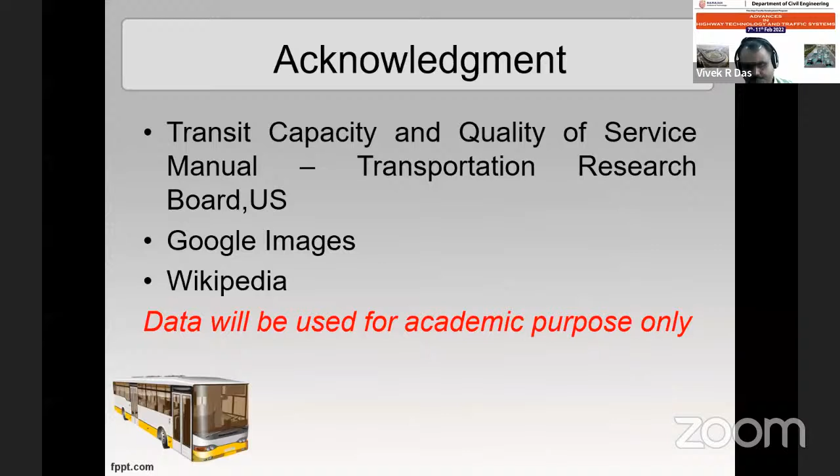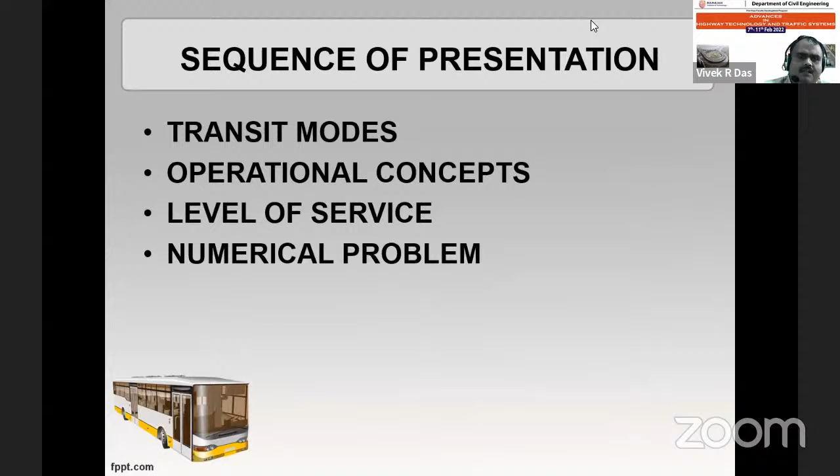So my sequence of presentation is shown here. I'll start with different types of transit modes available throughout the world. Then I'll get into operational concepts. Then how the level of service is estimated for a particular case. And finally, I'll go through a small numerical problem showing how a particular change in the system brings about a change in the level of service in public transit.

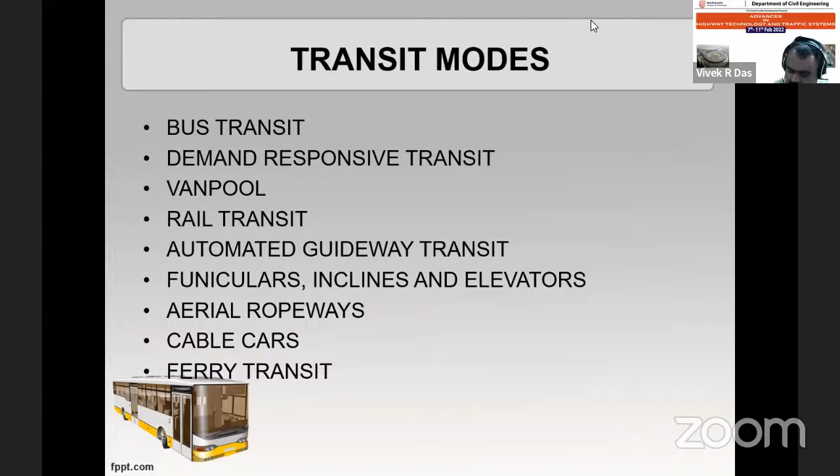Now if you take transit modes, especially we have bus transit, then demand responsive transit, then van pool, then rail transit, automated guideway transit, and funicular inclines like that. Let us see each one by one.

Another one is demand responsive transit. In India, we don't have this concept. This will not have any fixed route. The route will be varied based on the demand, and they provide these services within a particular route.

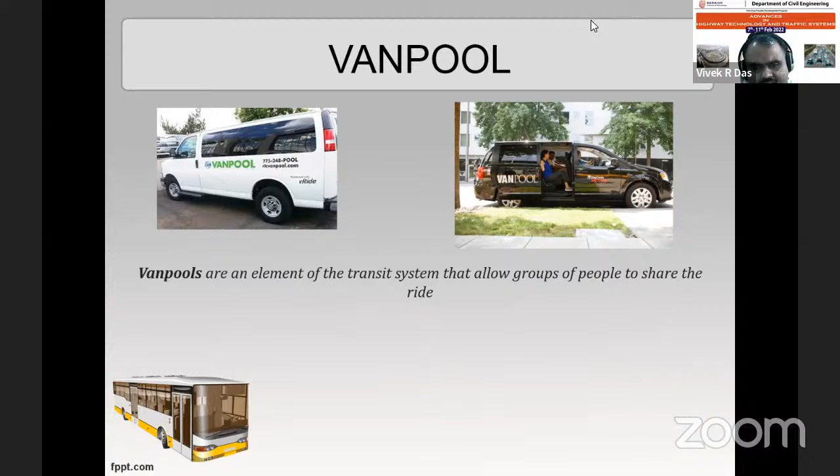Another one is van pool. This is somewhat similar to carpooling. There is a group of people who are going from a particular origin to a particular destination. They used to use a common mode.

Now all these transit services, what I am showing, has mainly three components. One is passenger load, second is speed, and another is reliability. I will discuss what each of these is in detail.

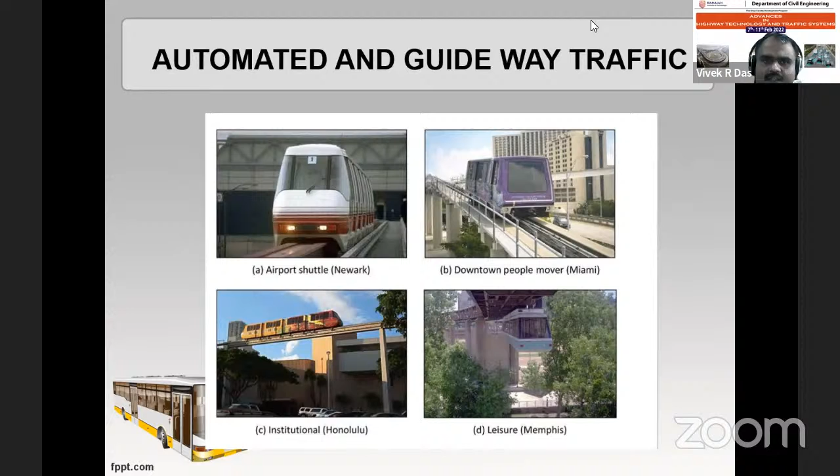Because to analyze a system, suppose you had developed a particular transit system in a particular route, you want to assess whether it is working properly. So how will you do it? These things will be discussed through this analysis of capacity. Or if you are implementing some changes in a particular system, how these changes will affect your transit capacity or level of service.

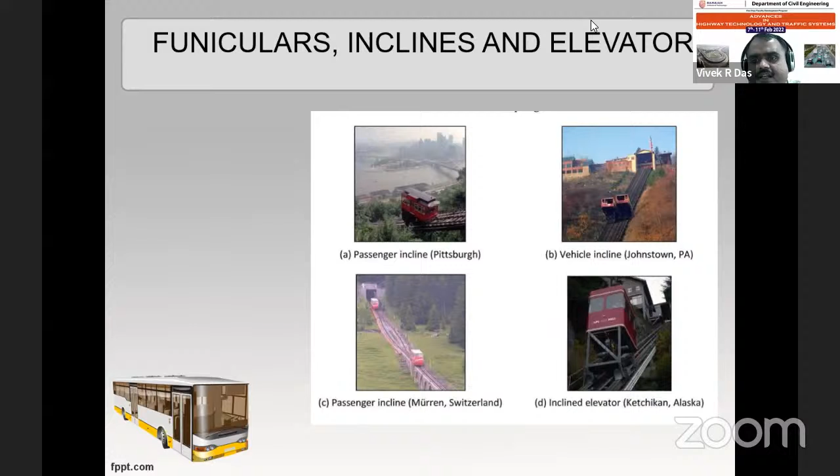Now let us see the operational concepts of a particular transit system. The most important parameters with respect to operational concepts are capacity, speed, and reliability. In addition, other parameters which contribute to operational performance are passenger demand characteristics, dwell time, the operating environment, and stop and station characteristics.

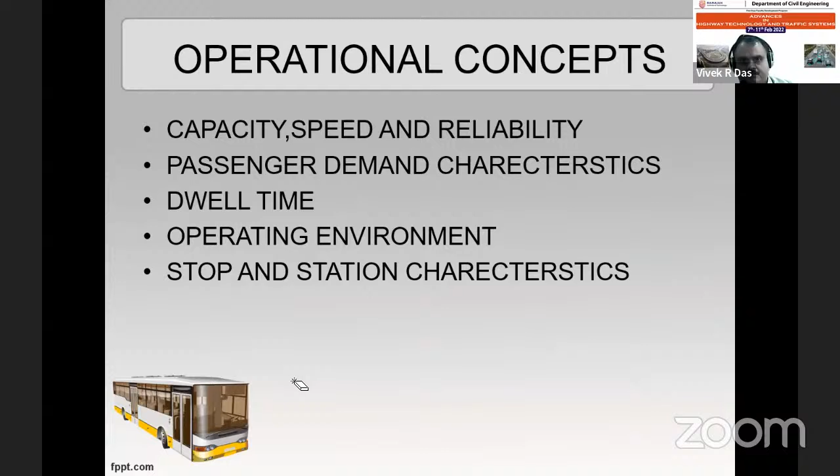Now we will see one by one the definition of this. What is person capacity? Person capacity is defined as, suppose if you are having a particular route. It is the number of passengers which can be transferred through a particular point under specified operating conditions without unreasonable delay, hazard, or with reasonable certainty.

These points are critical with respect to capacity. You have to specify what the operating conditions are, what the delay should be, what the hazard or restriction is, and what certainty you have to provide. Operating conditions means you can have different types of roads: 2-lane, 4-lane roads, or dedicated lanes. Those are operating conditions.

Without unreasonable delay means this delay varies with respect to land use. Suppose if you are having a particular road and this road has many schools, one school here, another school like this, then the delay will vary when you compare with other places having the same operating conditions and other parameters like hazard and reasonable uncertainty.

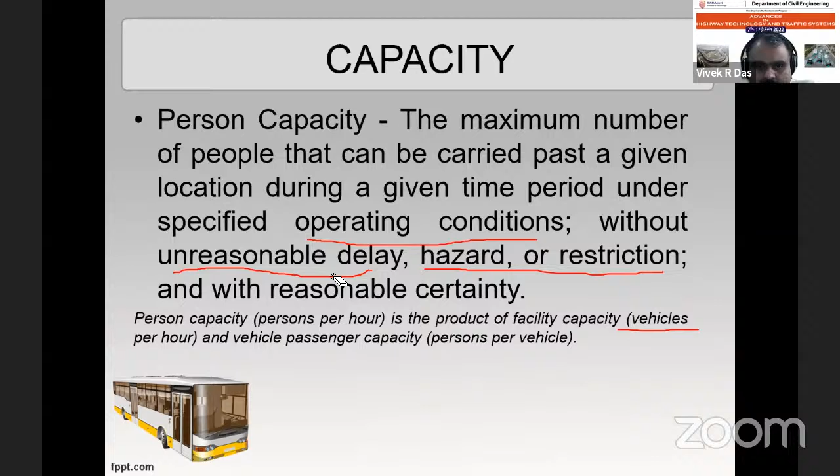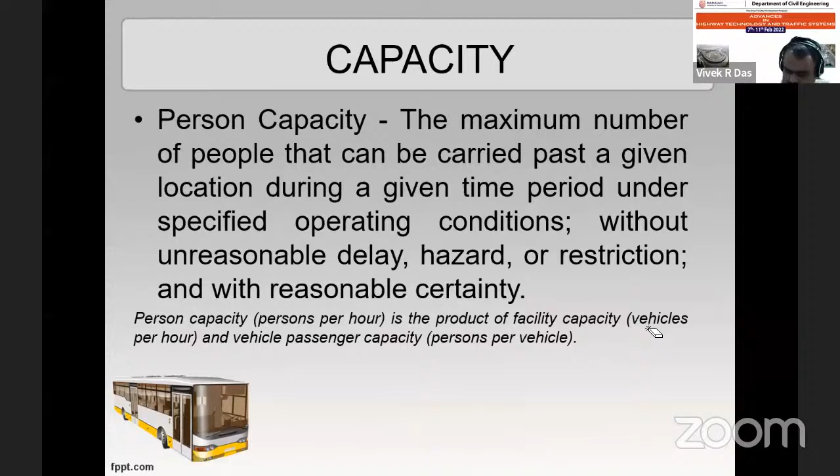Now, as I told previously, this depends on given locations, then operating conditions. If you take operating conditions, hazard and uncertainty, some places will have unreasonable delay. Just like I told you, some schools have land use changes, so the boarding and alighting time will be varying. So these factors have to be first fixed to fit the capacity of a transit system.

Now, with respect to vehicle capacity, it is the number of vehicles that we generally take with respect to traffic volume count survey: what is the number of vehicles which can pass through a particular point in a given interval of time? In our case, it is the number of transit vehicles, whether buses, trains, or other vessels.

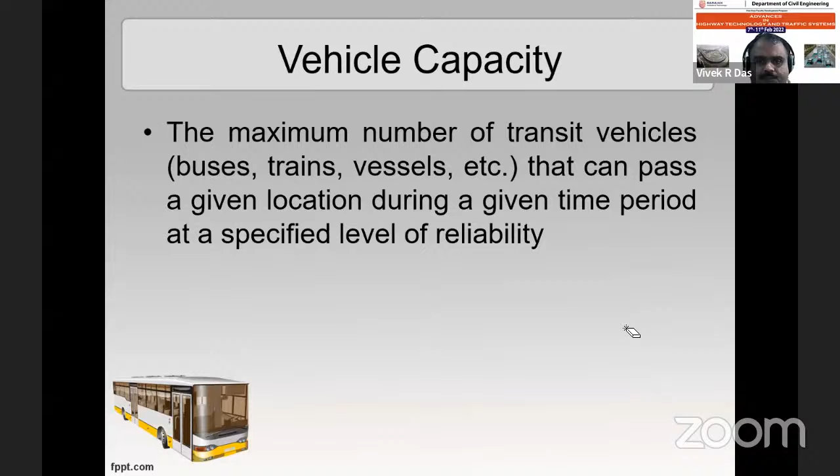Now we will take what are the factors on which passenger capacity depends. Generally, the unit will be number of passengers per hour. It depends on two things: vehicle passenger capacity, that is, what is the number of passengers that can be accommodated in a vehicle, and then the number of transit vehicles which are moving in a particular route.

If you take within these vehicles, this depends upon how many standing people there are, and how many unit vehicles there are. For example, if you are having a metro, you may have 2 or 3 cars, and that decides the number of passengers which can be accommodated in that service.

Another factor is seats and wheelchairs. If we include wheelchairs, the movement of passengers becomes difficult and the space gets reduced. Another important parameter that decides the seats and standees is the size and layout.

So previously I have shown some 3 or 4 pictures of bus transit. If you go inside these buses, the seating arrangement of each bus is itself different, so whatever number of passengers you can adopt in that also varies.

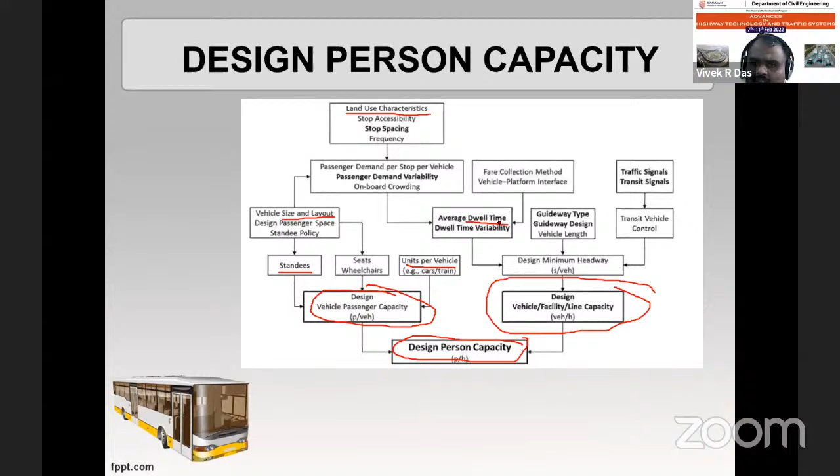Now, another important factor which depends on the capacity of transit is the speed. Speed is nothing but what we have studied as different types of speed in traffic - it is the distance traveled by time. That depends upon the travel time rates, that is, if you take a particular link, what is the travel time per mile or per kilometer within that link.

This travel time depends upon delay, then passenger service timing, and running time. Now, this running time depends upon the guideway design and vehicle speed. Suppose if you are having an old bus, the running time will be different. Suppose if we take the case of BRTS, Bus Rapid Transit System, you are providing a separate way for that, so the running time is different.

Now, if you take delay as a parameter, this depends upon transit preferential treatment. This means, as I told with BRTS, you are giving a dedicated lane, so delay will be less.

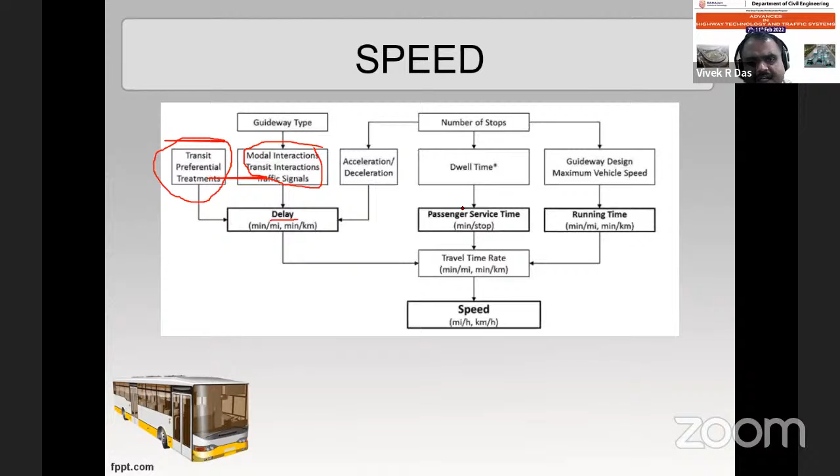Another factor is modal interaction. Modal interaction means within a road, you have different types of vehicles. If you take the case of bus transit, in the peak hour it has to interact with other vehicles, maybe cars, two-wheelers, and so on. Then traffic signals are another thing. So all these factors contribute some amount of delay.

Another factor is the acceleration and deceleration characteristics of the vehicle. Finally, these all come down to the number of stops. If the number of stops is more, then the acceleration and deceleration characteristics will also affect your speed. So when you look into the micro level, small parameters contribute small changes in the speed, which finally result in the variation of capacity and level of service of your transit.

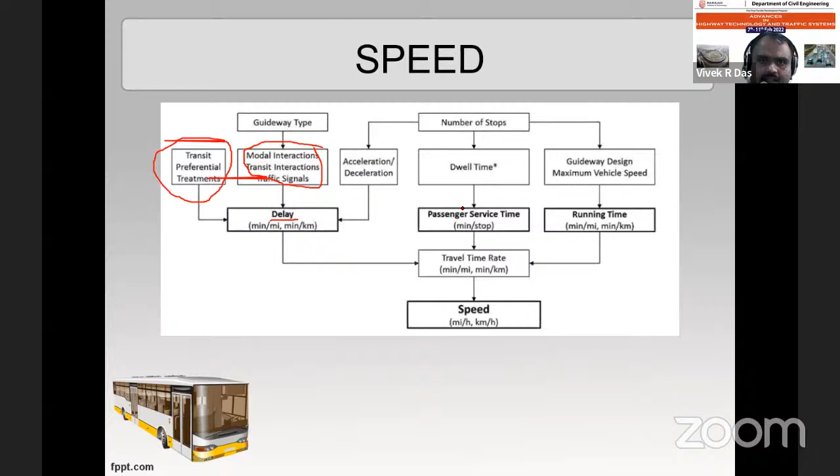Another important part is reliability. This is common in our roadways. If you define reliability, it is the confidence with which a bus will come to a particular stop at a particular time.

This varies with vehicle quality or vehicle age. In Bangalore, what we have observed is, if you want to move from one point to another, if you go in a Volvo bus you can reach very fast compared to a normal bus. A normal bus is old, and its acceleration and deceleration characteristics are different. If you fix a time of 9:20, it may reach around 9:25 or 9:30.

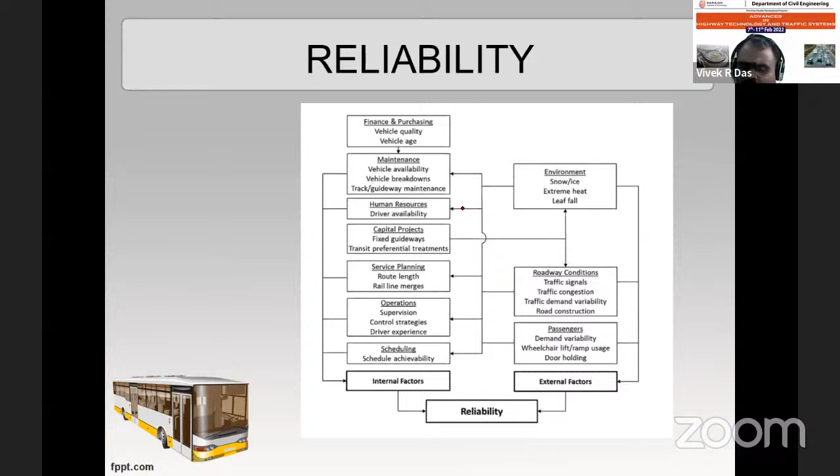Another factor with respect to passengers is, suppose if your bus moves through a hospital location. What happens is there may be a lot of patients there, so their boarding and alighting characteristics will be different. This will contribute some amount of variation in the schedule of the bus.

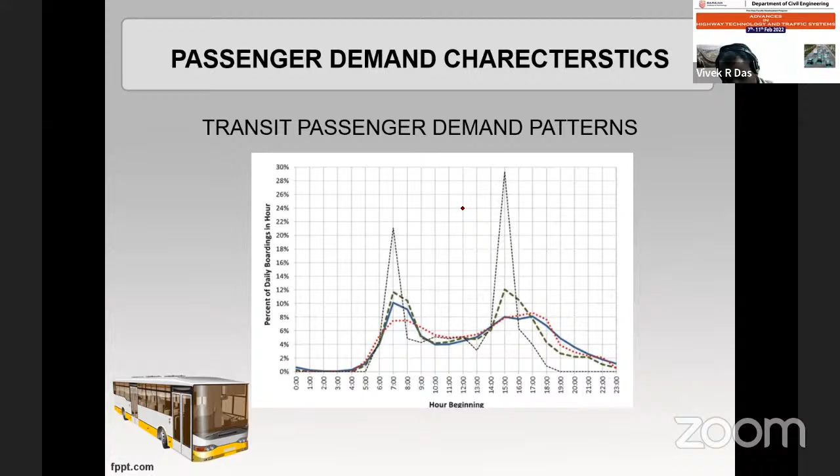Another one is peak hour demand variation. Within the peak hour, if you take a 15-minute peak, you can see that it is slightly higher. This passenger variation will also contribute to the passenger load on a particular route.

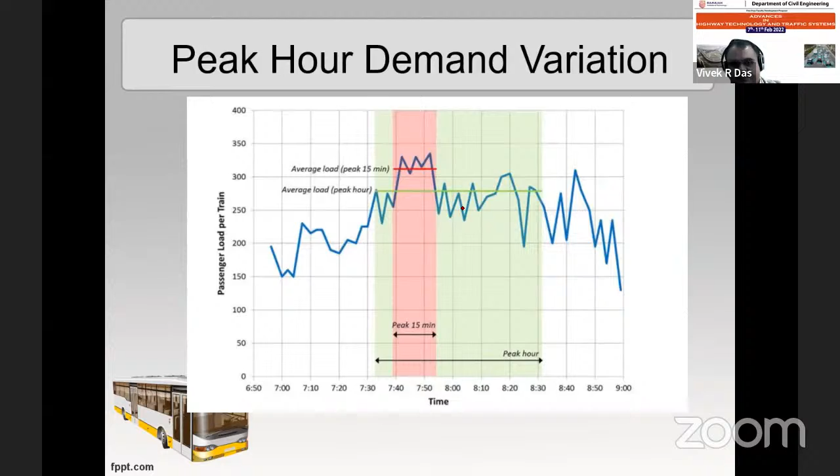And as I mentioned, dwell time is nothing but the time spent at a stop or station, mainly for the movement of passengers. This depends upon passenger boarding and alighting. If the number of boardings and alightings increases, dwell time will increase, and finally it will affect the reliability and the capacity of that system.

Another factor is fare payment. In India, we have mainly two methods: one is a ticket served by a conductor, and another is through a machine. If you have some other method, the passenger interaction within the bus also varies, which will affect the travel time of a particular route.

Another factor is vehicle type and size. If the vehicle size is larger and its doors are open, it will give less time for passengers to board and alight. Another is circulation within the vehicle; if more space is available within the bus, the movement of passengers during boarding and alighting will help decrease travel time.

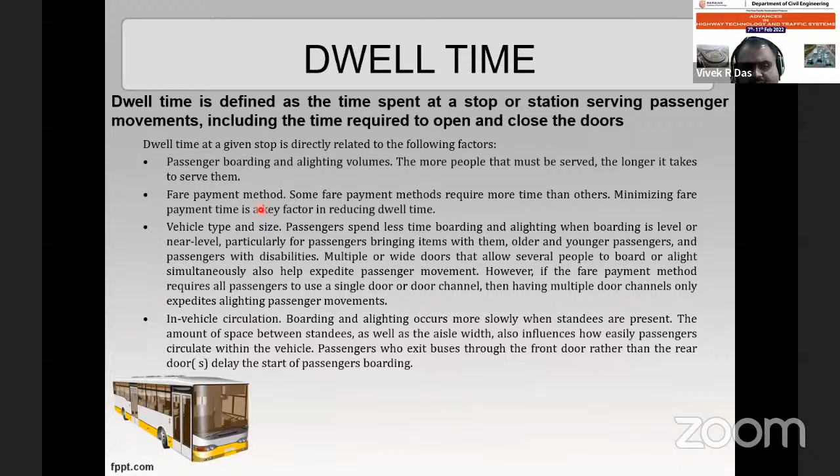Now this particular graph shows the variation of dwell time with respect to capacity of the bus. If I take a particular point, 45 seconds, you can see that the capacity is somewhere around 48-49%. Now if the dwell time is slightly reduced to 35 seconds, you can see an increase in capacity of about 10%, going to something around 60%.

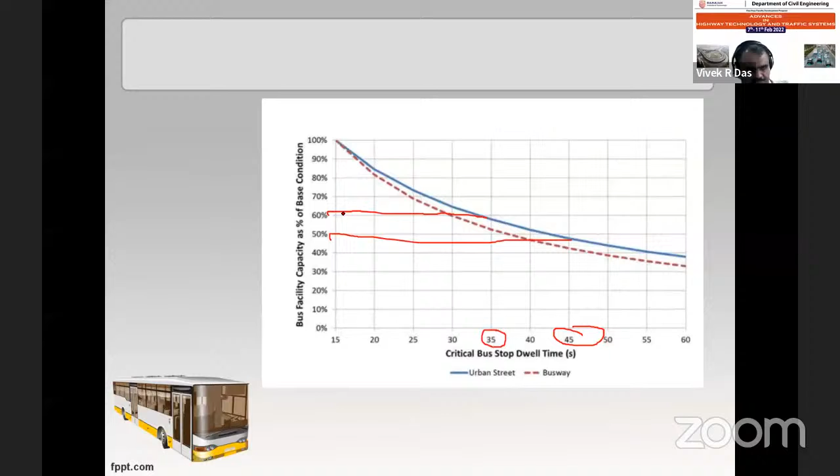Another one is operating environment. Now you are having the transit moving in different operating environments. One is mixed traffic. Best example is our public transport bus. You can see that the bus is moving with different types of traffic, for example, cars, two-wheelers, autos, even bullock carts are also there.

Another one is semi-exclusive, or lane partially reserved for transit use. For example, if you take the example of a light rail transit system, for example, trams in Kolkata, it is a semi-exclusive lane. The thing is, it is moving with mixed traffic, but it is interacting with some amount of vehicles also.

Another one is exclusive lane, but you are sharing a portion of right of way. For example, your bus rapid transit system, that is BRTS, what you are doing is within the road, you are providing a particular lane only for bus.

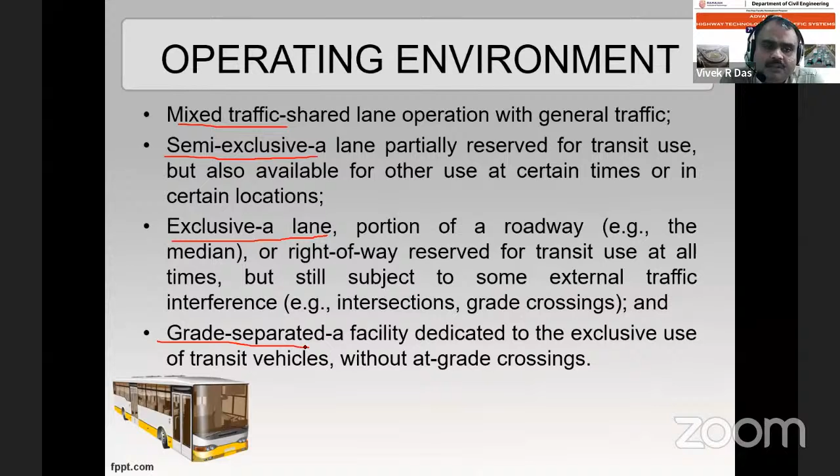Another one is grade separated, the best example is your metro. What you are doing is you are taking the entire traffic away from mixed traffic and a dedicated facility is being provided. This also affects your capacity, and you can see that from mixed traffic to grade separated, the capacity increases drastically, but the cost also increases.

These are some comparisons of the guideway types with respect to traffic control, traffic delay, and speed restrictions. Now, if you see mixed traffic, you can see that the speed is mainly regulated by other vehicles in the traffic. Whereas if you come to grade separated, the speed is not affected by any other traffic. You will go with respect to design speed.

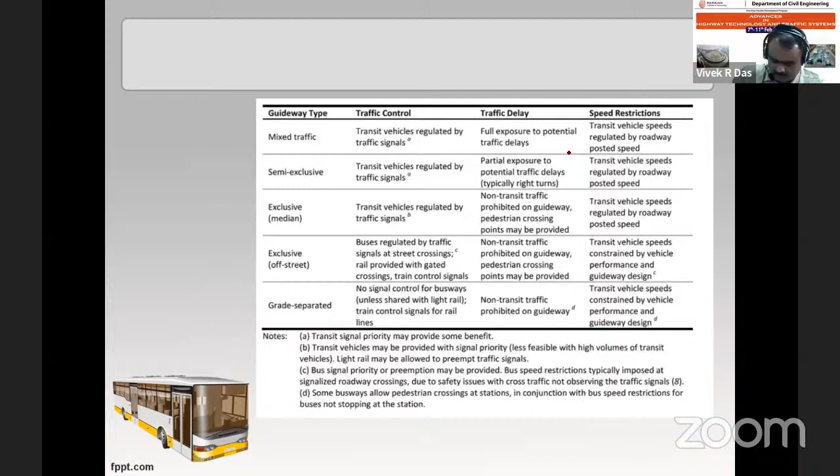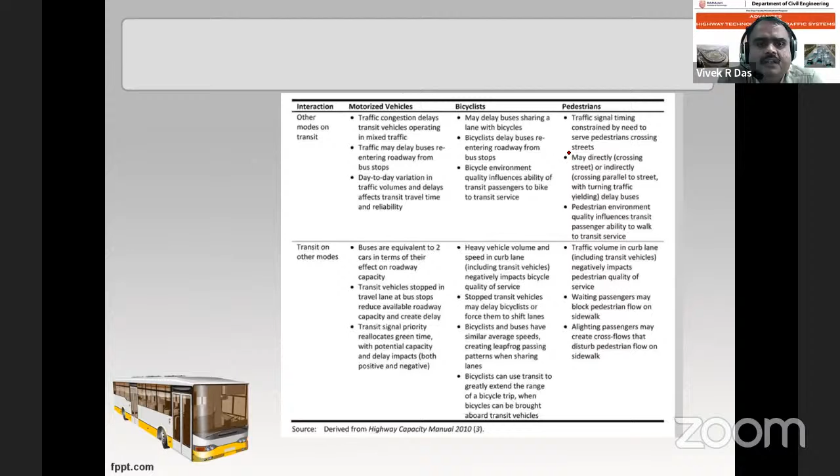Even if you provide design speed with respect to geometrics, you will not be able to achieve it due to the influence of other vehicles in the traffic, in the mixed traffic case. The same thing varies with other guideway types also. In addition to that, there will be some interactions with bicyclists and pedestrians. The presence of bicyclists will delay the buses entering the roadway from the stops. Similarly with pedestrians. So this will also obstruct the movement of transit.

Another important factor which decides the capacity is vehicle platform interface. Now, if you provide a low floor type bus, the boarding and alighting time you can decrease. But with respect to geometry, there are some restrictions. Another one is vehicle characteristics. As I already told, with respect to type of vehicles, the capacity also varies. Another is fare collection and stop spacing. If the number of stops is more, the boarding and alighting also will be more. So this also will affect the capacity in a particular route.

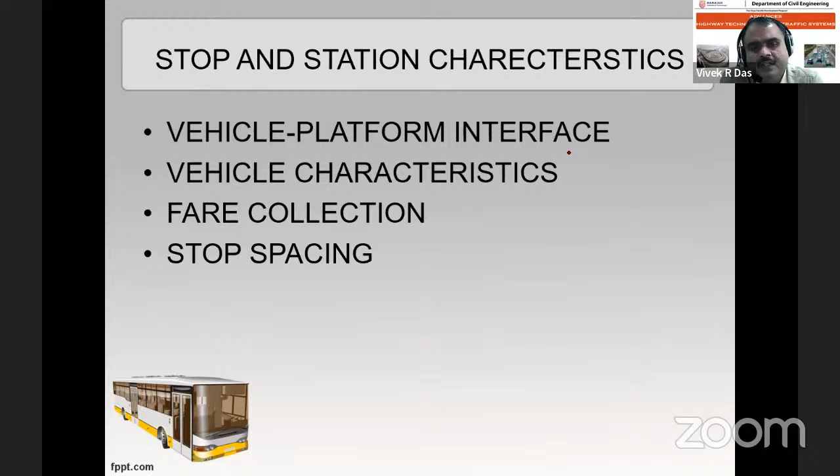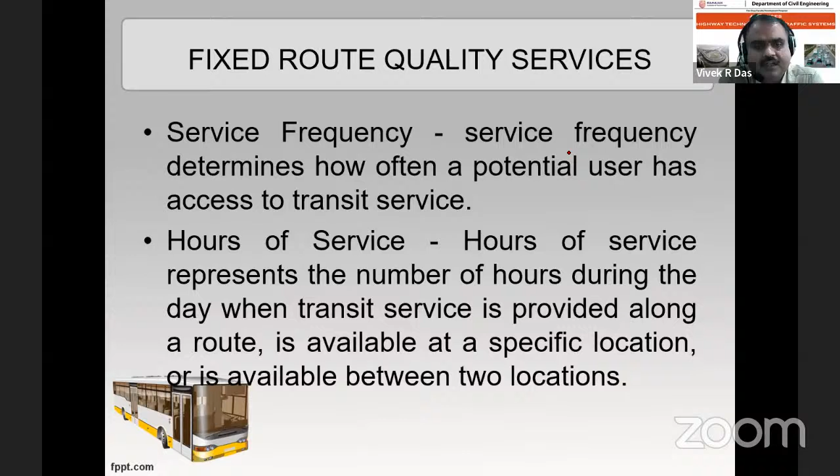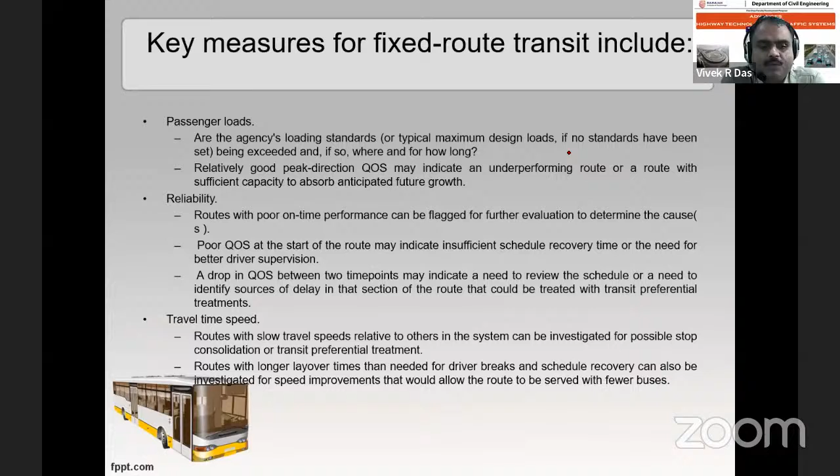Reliability, as I already told, is the confidence with which a particular schedule will perform properly. Another one is travel time. Travel time depends on various factors: number of stops, types of vehicles, type of routes, etc.

Now, coming to the concept of level of service. I am explaining the level of service for a bus transit facility. These are some empirical equations which are explained in the transit capacity manual. The first most important part is the transit wait ride score. The transit wait ride score depends on headway factors and perceived travel time factors.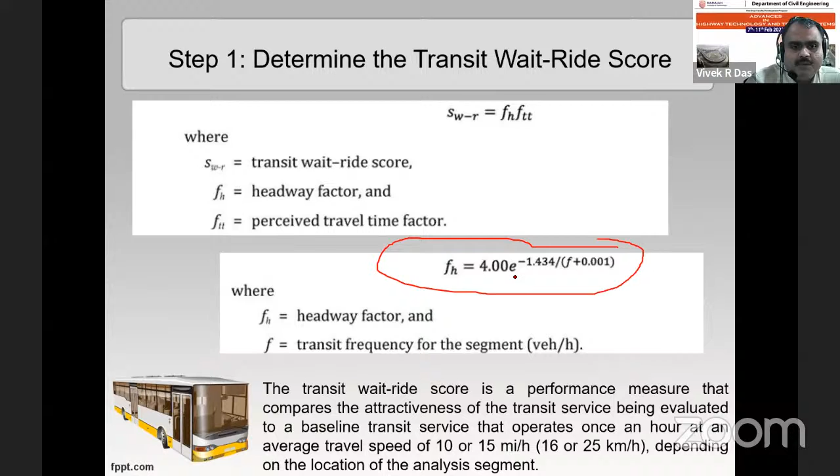Now, if you take headway factors, it is nothing but the number of vehicles or transit which is moving through a particular route. If you see that equation, it is in the form of a negative exponential function. And they have developed an empirical equation for that, and this is shown here. Another parameter is the perceived travel time factor.

So perceived travel time factors have various components. One is relating to passenger loads. Another one is with respect to speed. Another one with respect to reliability. And another one with respect to stop amenities. Now we will see each of these parameters, what it is.

So it depends on ridership elasticity. Ridership elasticity is nothing but the variation of riders or passengers in a particular route. They have taken it based on weight. If you take a metropolitan area, it is 6, and if it is other than CBD, you can take 4. The unit is minutes per mile.

So it is nothing but, in a particular route, if you take per mile or per kilometer, how much time you require to travel. For example, it shows that in CBD areas you take something around 6 minutes to travel 1 mile. Or if you go outside a CBD area, you take something around 4 minutes to travel 1 mile distance.

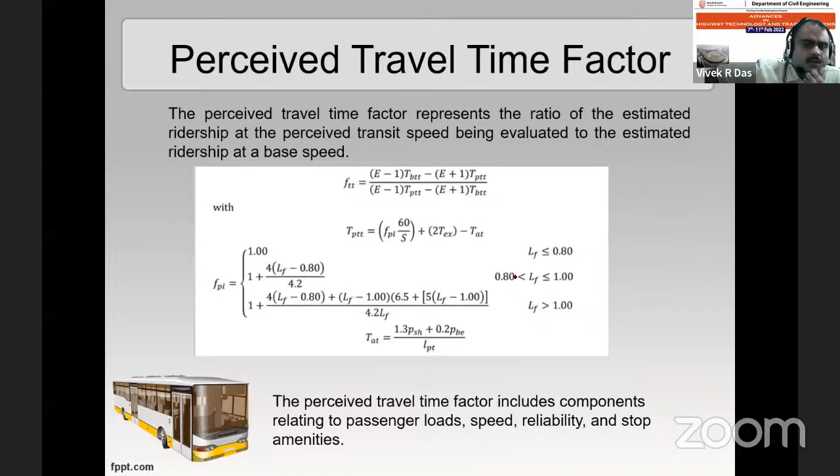You can see the previous equation, TAT. So it depends on the number of passengers, that is passenger trip length LPT, and the shelters and benches available. So PSH is the proportion of stops with shelters and PBE is with benches.

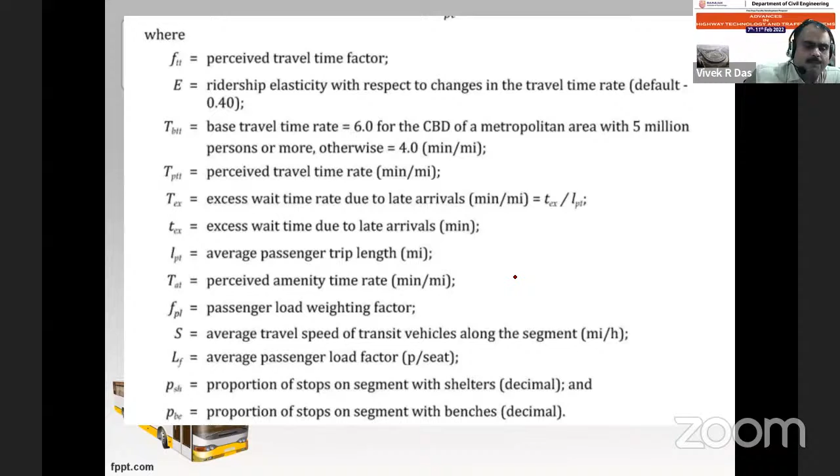PPK. So what I want to tell is this mathematical model has been developed for US conditions. So in Indian conditions, for each parameter, what I feel is you can make one research topic. Finally, it can contribute to the development of transit capacity within our country.

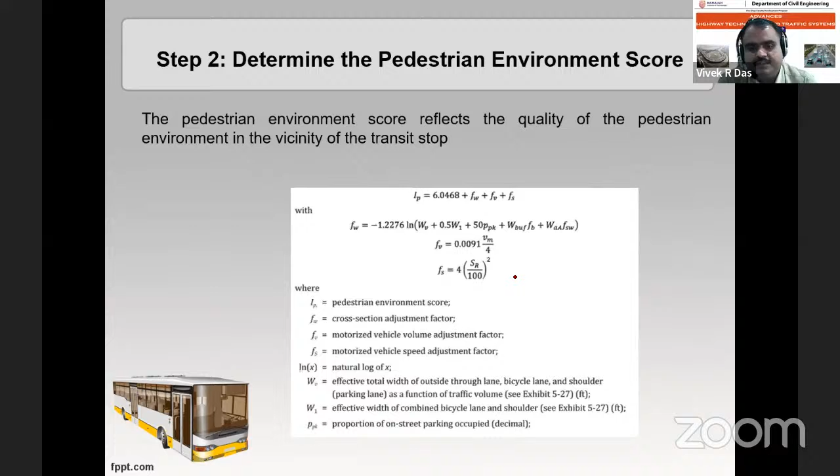Now you can see that they have put a lot of effort to bring out this manual, and all the parameters are covered with respect to transit. These are other factors which we have already explained. Finally, they have arrived at a score which is called the level of service score, which is represented from A to F, and the values vary from 2 to 5. Less than 2 shows a good level of service, and greater than 5 shows a very bad level of service.

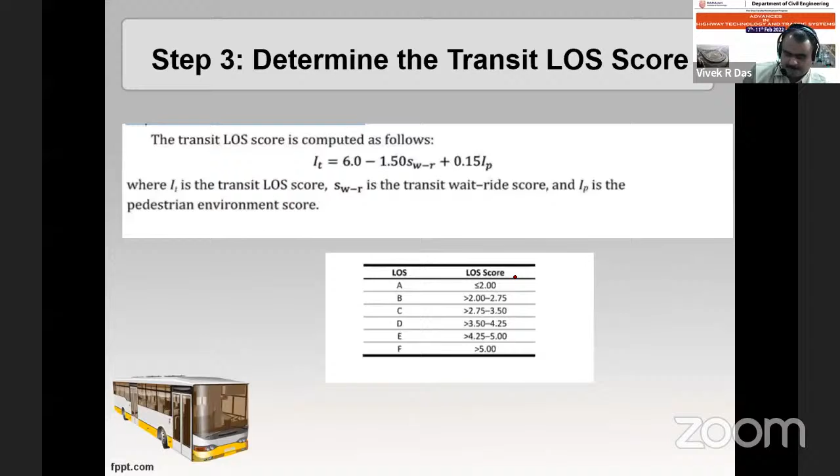Now we will do a small numerical problem with respect to this. So the situation is this: you have an arterial street which runs through an older commercial district of a city, a couple of miles from the city center. As part of planning, they want to improve the transportation options in the area by changing the available right of way for different modes. So they have considered multimodal level of service performance measures to analyze all these alternatives.

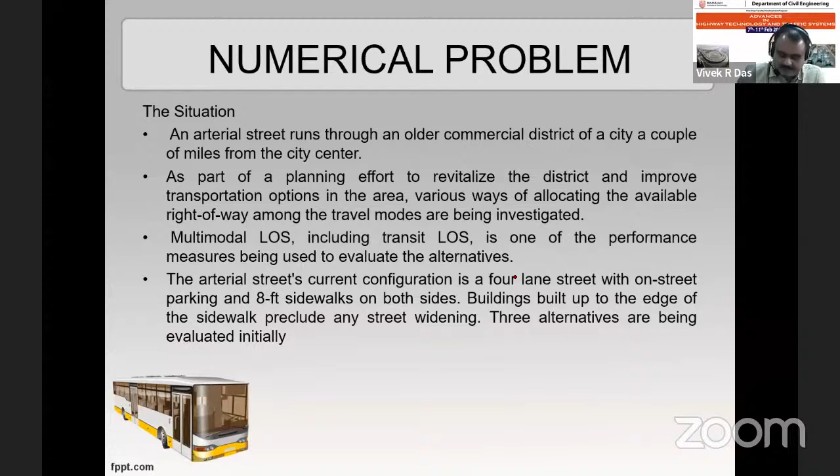The configuration is a 4-lane street with on-street parking and 8 feet sidewalks on both sides. And they have buildings to the edge of the sidewalk, and 3 alternatives have been analyzed. Alternative 1 is to replace the on-street parking with bicycle lanes and wider sidewalks. Alternative 2 is to reduce the roadway to 1 travel lane in each direction and provide a landscaped median.

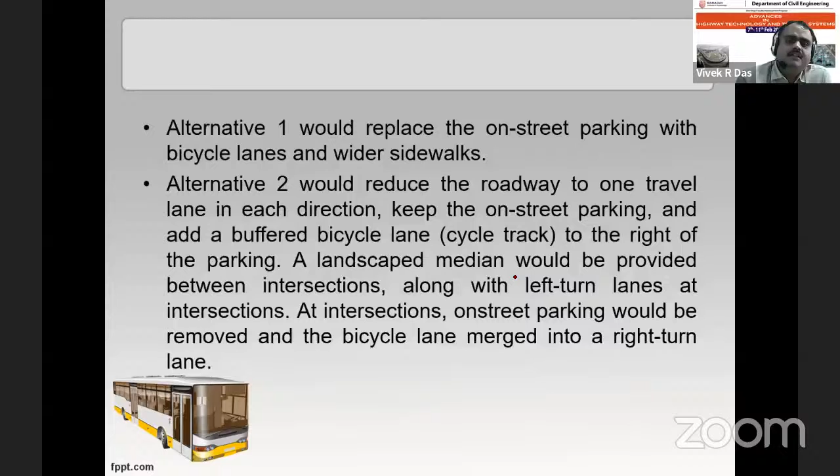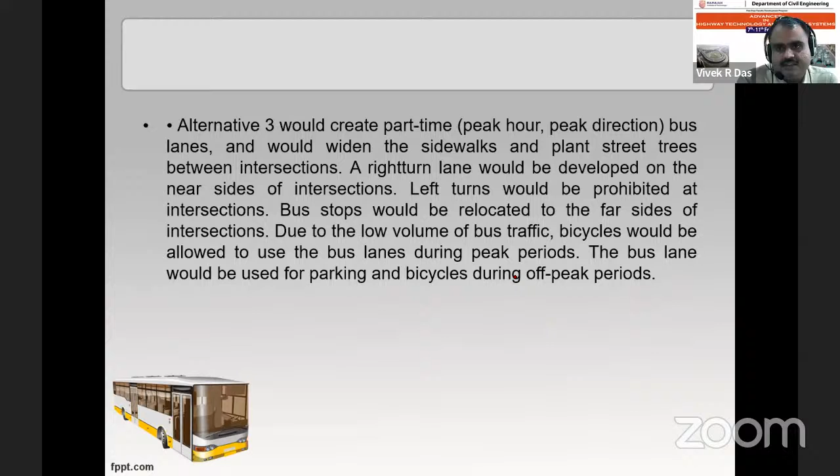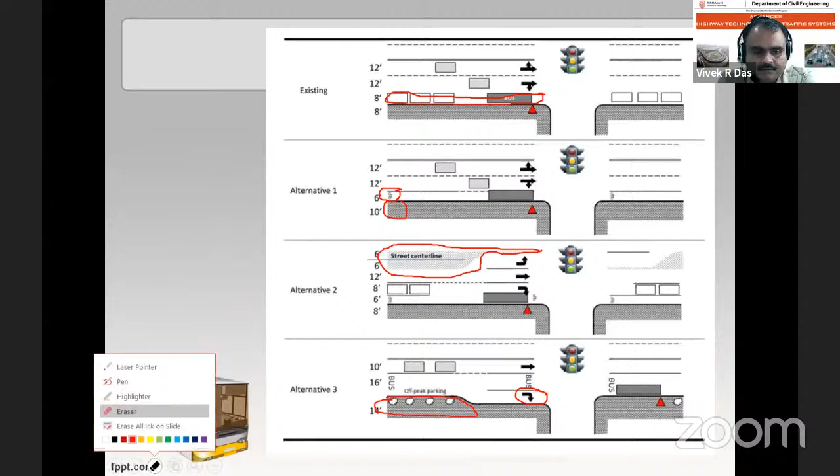So the question is, what is each alternative's transit level of service during the weekday peak hour? That is, you have one base condition and you have proposed 3 alternatives, and what will be the level of service for these 3 alternatives?

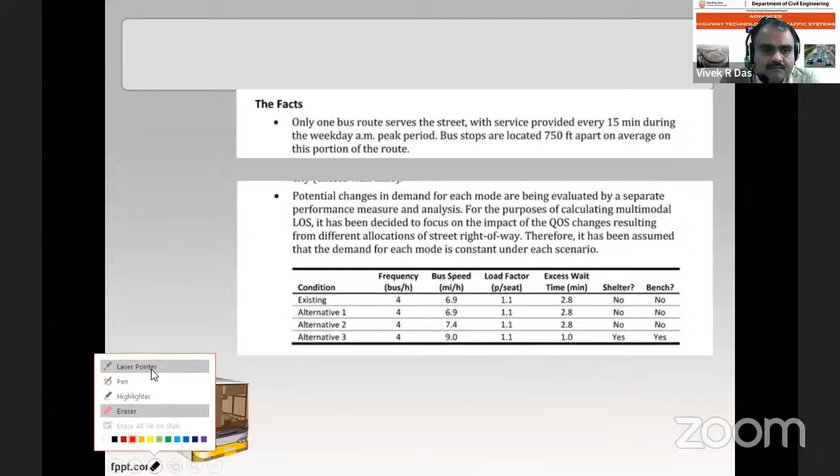So what are the data that they have collected? The bus service was provided every 15 minutes. Bus stops were located around 750 feet apart. The frequency of buses for all these alternatives is the same: 4 buses per hour. For each alternative, there is a slight variation in bus speed.

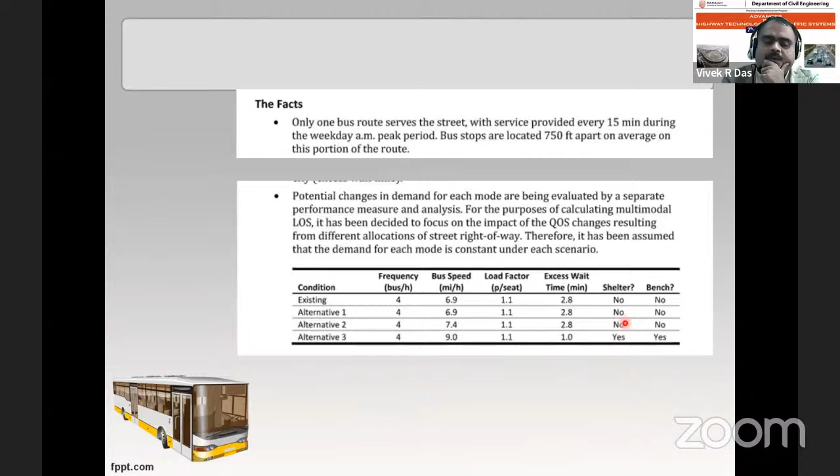The load factor, which is nothing but number of passengers per seat or number of passengers per bus, is almost the same. Excess waiting time is slightly different for alternative 3. In alternative 3, you have provided some shelter and benches. Why? Because you have provided some landscaping there.

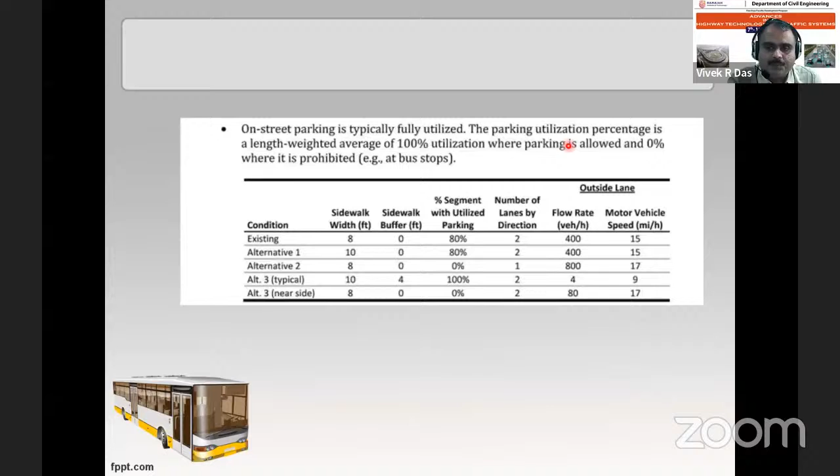Then the geometric factors: sidewalk width, sidewalk buffer, any extra distance, and percentage of segment which is utilized by parking. Then number of lanes by direction, vehicles per hour, total flow, and average motor vehicle speed. Now with this, we will go through each step.

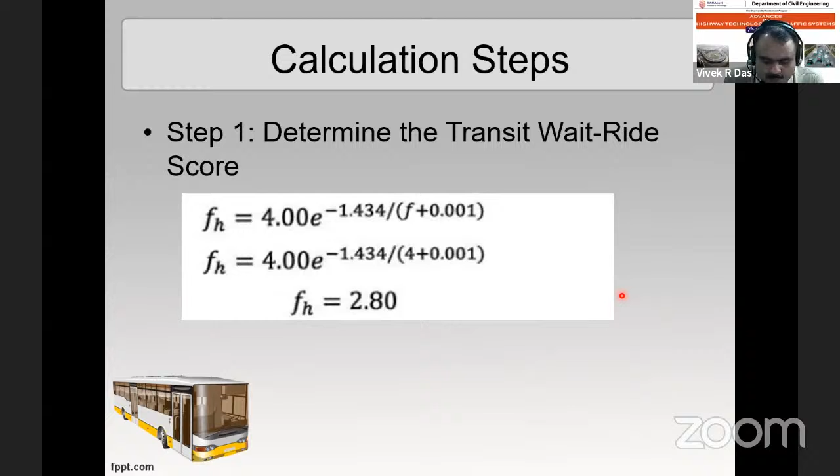So step 1, you find out the transit wait ride score. First you have to find out your FH, that is your headway factor. Once you substitute F, which is your frequency, which is 4, you will get a factor of 2.8. This means it provides a ridership of 2.8 times the existing ridership.

Another one is the perceived travel time factor. To find the perceived travel time factor, you have to find various parameters. One is the passenger load factor, and this is estimated using that empirical equation. Since the passenger load is 1.1 passengers per seat, we have to use the third equation, 1 plus LF greater than 1. So the load factor comes to around 1.41.

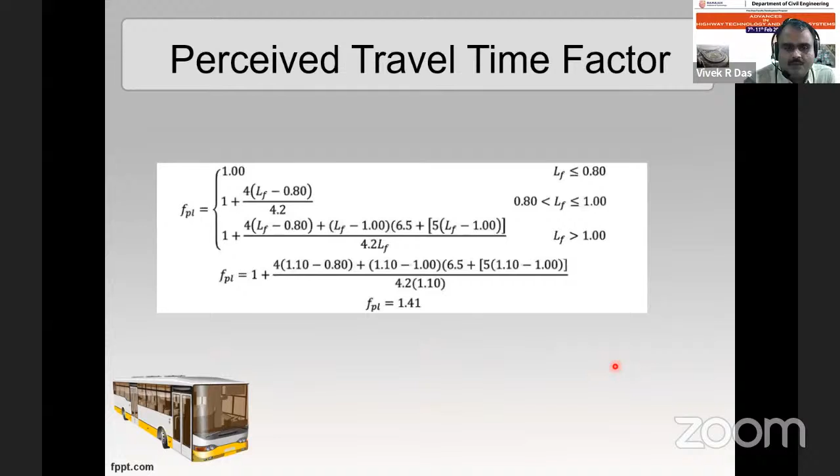And since there are no benches and no shelter in the first case, the values of TAT will be 0. Substituting this, for the perceived travel time rate you will get 13.8 minutes per mile. That means for traveling 1 mile in the base condition, you require around 13.8 minutes.

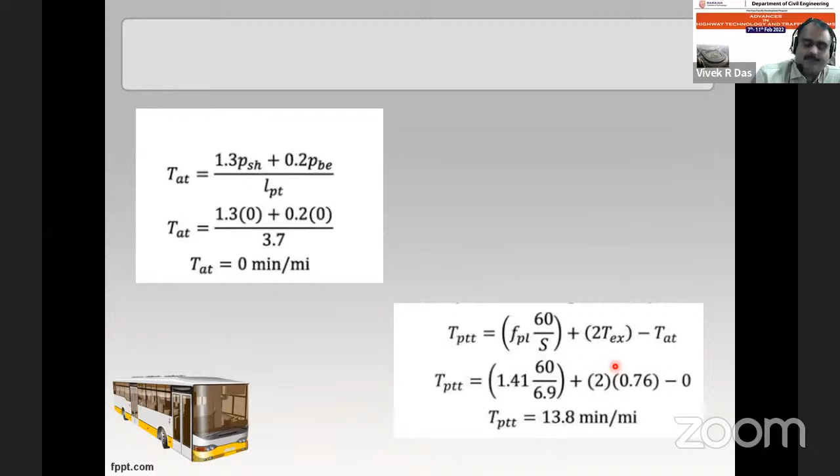Now, the perceived travel time factor for that base condition, substituting the previous values in the equation, gives a value of around 0.64. So finally, your transit wait ride score is the multiplication of FH and FTT, so you will get a value of 1.79.

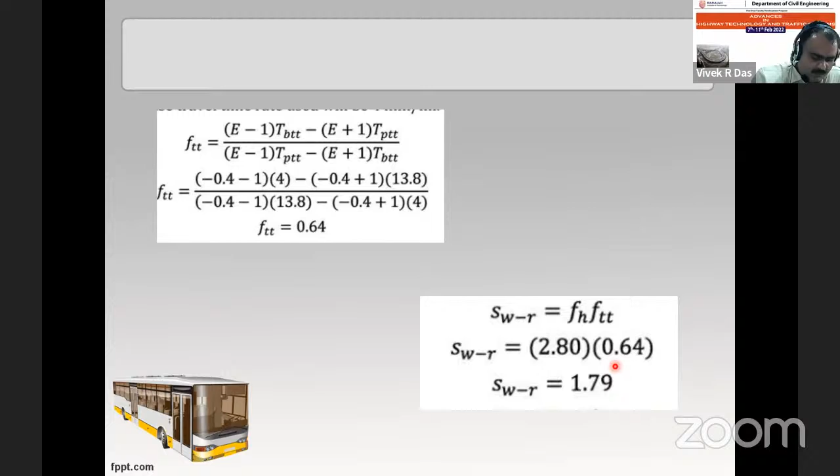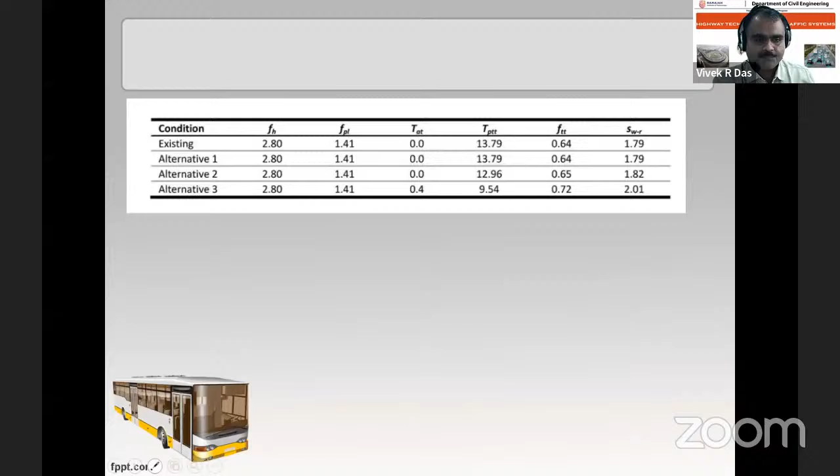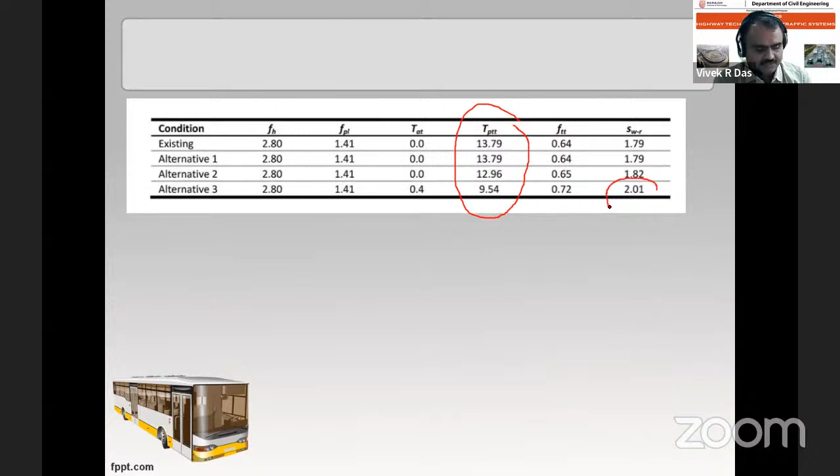Now we will analyze these 3 cases with respect to transit wait ride score. If you take the perceived travel time rate, you can see that in the existing condition you require 13.79 minutes to travel 1 mile, whereas with alternative 3, you require only 9.54 minutes to travel 1 mile. The same is indicated in your transit wait ride score.

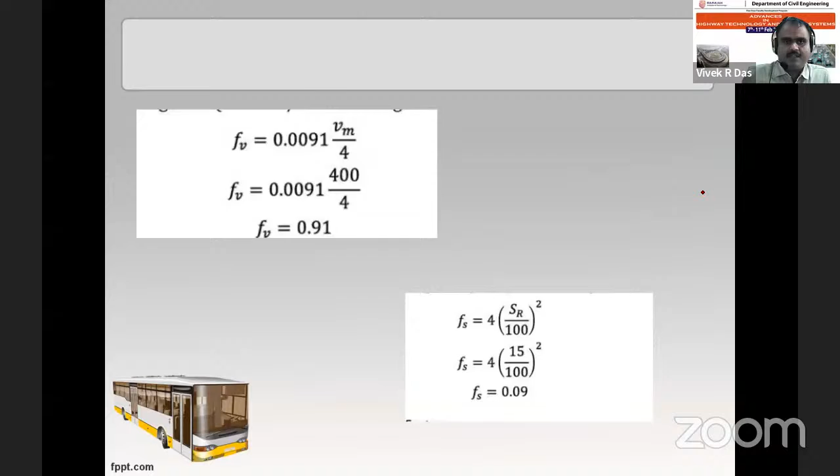Now, for the other factors to determine the pedestrian environmental score, you can directly substitute in that empirical equation and you will get corresponding values. From that empirical equation, you will get a value of minus 5.47, 1.58. Coming to the last one, the pedestrian environmental score, you can see it is least for alternative 3, that is 1.16, where you have provided some amenities.

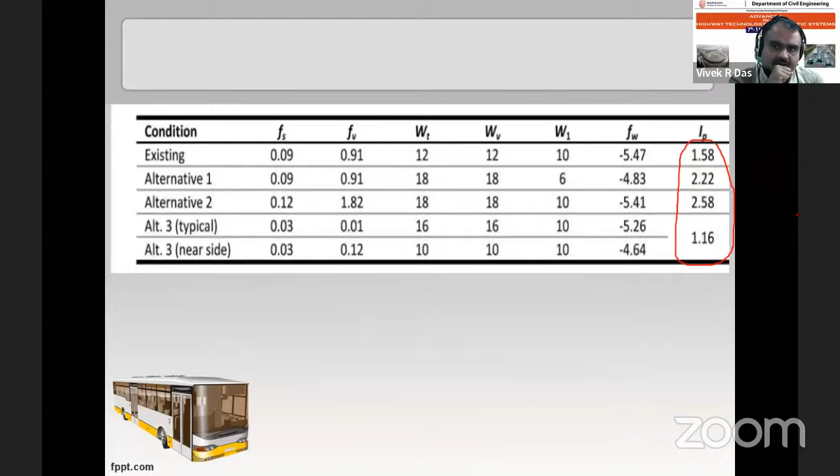Now coming to your final level of service and level of service score, you get a value of 3.56 for the first case, whereas for alternatives 1 and 2 it is slightly higher, and for alternative 3 it is less. So you obtain a higher level of service of C with respect to that.

Now, what I want to conclude is, even though these relations are empirical, technically you are able to conclude that these parameters are influencing your transit capacity. Otherwise, if you want to make some changes in the system, we used to just go with some logical decision. Suppose you want to provide a busway; we will just see whether space is available and provide the busway. But there is no technical relation between these things.

So what we have analyzed is, with respect to the present problem, you are having the best option as alternative 3. That is some landscaping you have to provide in the vicinity, providing a dedicated right turn lane for buses. It is the best option compared to the other three.

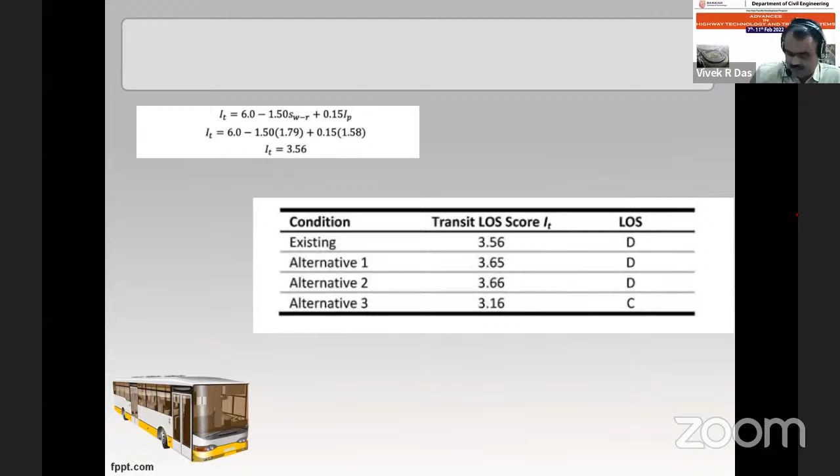Now with that, I have come to the end of my presentation. So what I feel is the major takeaway from this presentation is passenger loads, speed and reliability are the most important parameters of transit capacities. And the capacity estimation with respect to transit is not developed that much. Presently, we are designing with respect to logic, which has to be further enhanced with respect to these parameters. Thank you.